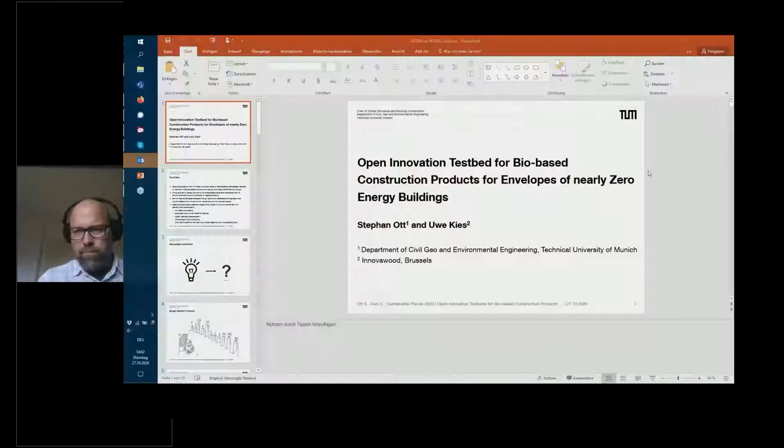Hello everybody, I hope you can see my screen now. I switch to the presentation mode. Please give me a short feedback if everything is okay. Yes, Stephan, we can see your screen.

Okay perfect, thank you very much Zia for the nice introduction. As you heard, the title is about innovation, about construction products related to nearly zero energy buildings. I will present this short talk together with Uwe Kies, who is co-writer of this presentation.

We are going to show you and discuss our open testbed initiative, which is a loose collaboration between several European testbeds or testing facilities and approval bodies dealing with research and development of construction products, and also helping SMEs and industry companies bring their products to market, and certify, test and approve the products.

So what's all about in this very important area, now accelerating with the new Green Deal, of nearly zero energy buildings and the related products, and what can we contribute to this.

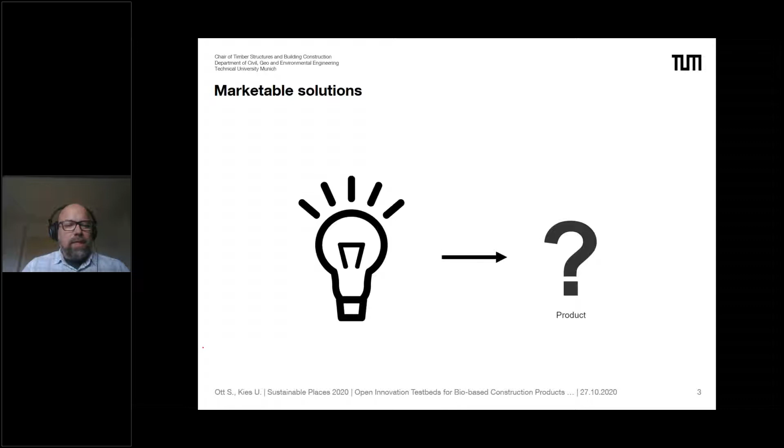There are several issues we should consider, because it's not so easy to bring a product to the market. The steps from the first idea until it's a real product that can be marketed are a very tough journey.

In this slide I want to highlight that it's also difficult to address the European market with a product, because although we have the single market, we still have different gates we have to fit into. There are common harmonized European standards for certain products, but not for all products, and there are additional national requirements that have to be fulfilled when the product is supplied in a national market.

So when we follow this route, or when the manufacturer starts with this new product idea and wants to bring it to the market, he normally goes to the technical authorities of his country—for this example, it's a German Institute for Construction Technology—and they give feedback on the requirements of this product based on the harmonized European standards, the harmonized EN standards. If there are no harmonized standards available for this category of product, a European assessment document needs to be developed.

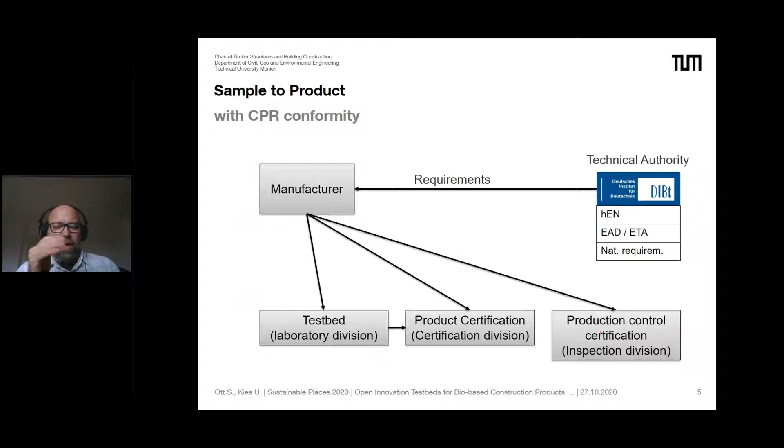So you see also what different steps have to be done in testing or fulfilling the requirements or approval of the requirements. There's normally the test beds which do the testing and check the performance of the products. Then the product certification is done with its own division, which is separated from the test beds normally to avoid any conflict of interest. And then there is also follow-up production control of the product to ensure its quality.

How do we achieve now the replicable and upscalable product, which can really address the market and also can be sold throughout Europe?

We want to focus, or our testbed is mainly focused on the bio-based materials.

And the bio-based materials are important in this New Green Deal initiative, and also for future climate change mitigation measures as a very important material group, because they can capture carbon by their nature, and it's also a material which can be produced and manufactured very easily. It's lightweight, and it's still strong, and you can make a huge bunch of products out of it. But let's say why we also join forces in this area is this product is a natural product.

Therefore there's inhomogeneity and anisotropic properties of the material. And as you see in the right picture in the forest, no tree resembles another one exactly, and you see it also here in the detailed cross-section or cut of this log, that you have different properties throughout the entire diameter of this cross-section.

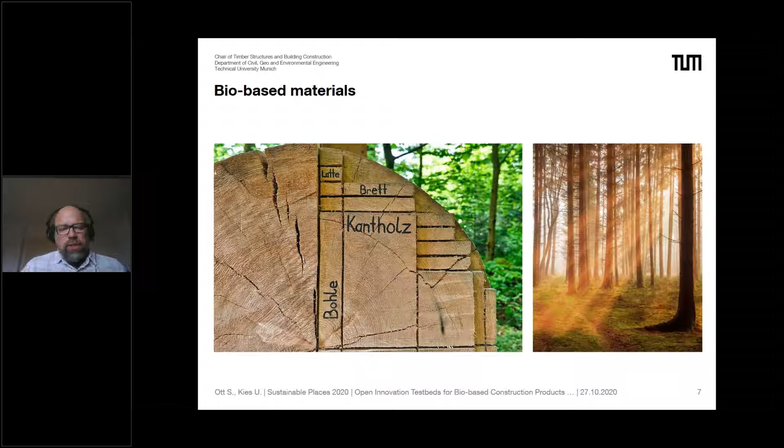So what we need here is also a quite deep insight into this material, a good understanding, and therefore this group of experts is joining forces to develop, with new tools and innovations, the knowledge on this material, and how to bring this knowledge also into the market.

I just want first to highlight again the very important issue of the carbon capture properties of this material, because when you look only at the forest system on the left-hand side, you have already this carbon sequestration or carbon capture by the growth of the plants, and then if they are not used, you have an output of this biogenic carbon. It's an emission—in the end the balance is zero, but there are these emissions.

But when we continue and use some of the trees and make place for a new tree or new plants to grow on this area, this new plant can capture carbon, and we can use this tree for producing material, manufacture and transform this raw material into useful products, and still store a lot of carbon inside this material itself—if we consider that our input of carbon storage in the material is higher than the output for producing it in the building sector or in the product.

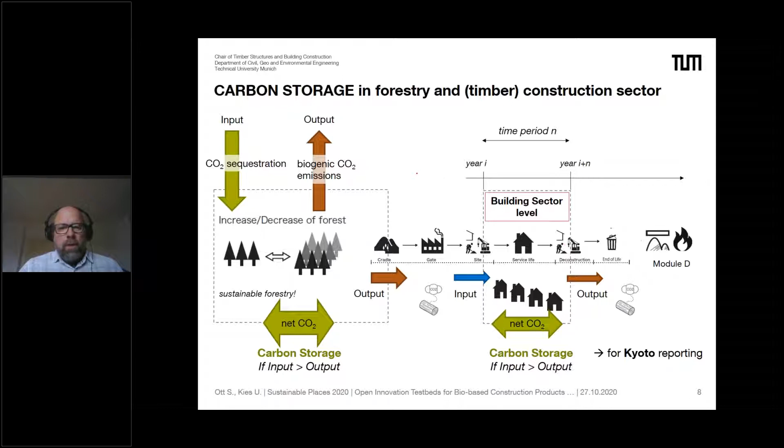As I said, the product is very inhomogeneous, the material is very inhomogeneous. So we have to consider different approaches to tackle the performance and characteristics of the material, and there are diverse types of use of this material in different products with different properties, because they are transformed not only once but several times.

What I want to lay out here is that we have to consider natural products which are harvested and processed. They have a given microstructure by nature, by their growth, and inherent properties which are not equal, because they are natural materials. But these are the natural products.

Then we have classical products, traditionally processed, which have their own microstructure because they are made out of particles from the natural product together with an artificial binder or compound material, pressed into a homogenized material in these profiles. This material also has characteristic properties, but it's still a plain material which is mass produced, and very often has only one single function—like here, a load-bearing profile for fixture of other stuff.

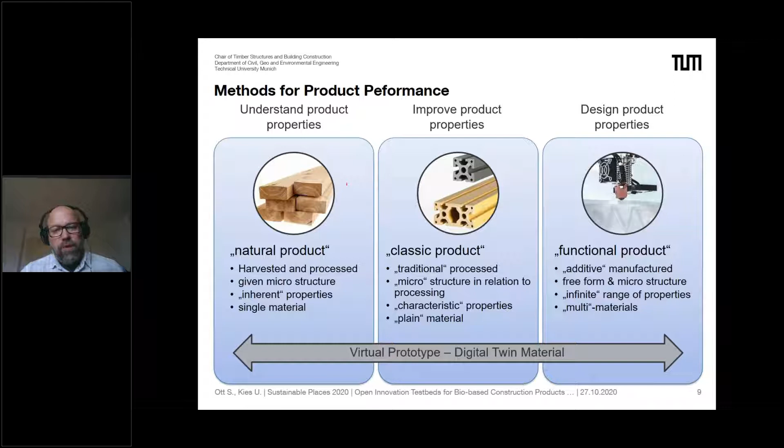To come from these natural materials and products to these functional products, you need virtual prototyping, and you need digital twins of this material where you have the characterization of these properties. Then when you want to improve or adjust this product performance, you have to optimize it. This optimization task—I just want to pick out two examples here.

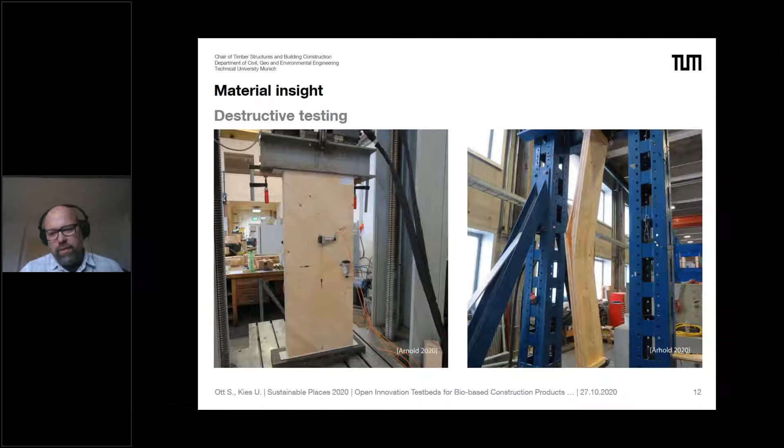We have here also other methods which are very important when it comes to these functional materials, which is non-destructive testing, for example using CT scanning, where we really get a material insight into the structure. Here is an example of a porous metal material, like a metal foam, which was CT scanned in layers, and from these layers the digital twin of this material was generated as a 3D model, with all the artifacts, deficiencies, and solid geometry incorporated.

This material insight gets us to the next step, where we can use this digital twin to simulate the properties and improve the characteristics virtually, or to test the strength of the material virtually, and try to find quicker and more targeted ways to develop the product further.

Not only is testing of the material possible, but also an advanced manufacturing process, or a test or simulation of the manufacturing process, can be done using data from previous samples. This can then be used for simulating the properties, and also artifacts or holes or deficiencies in new samples.

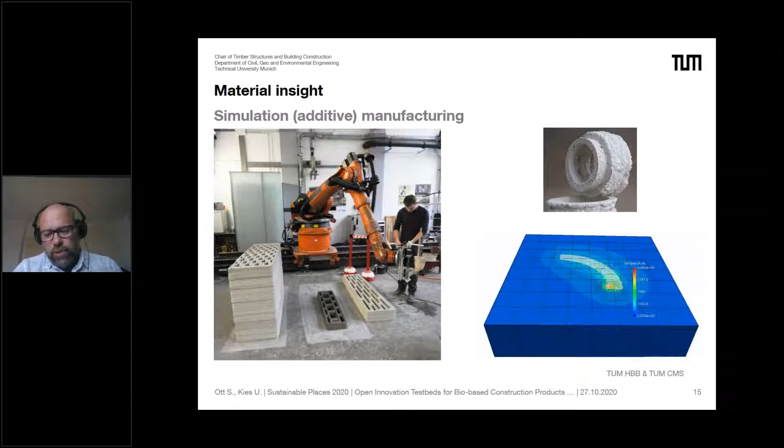Now I want to come to circularity, because we've looked at the possibilities of developing the more mechanical, structural, and process related properties. In the circularity field, there is also a lot of progress that can be made when the sustainability criteria are defined. For us, it's mainly using more bio-based materials, increasing the amount of secondary material in the products, looking for easier separability of materials, elimination of hazardous substances, and increased or longer cycles of use through increased durability and more cycles of reuse of the material.

We can also use the previously shown methods, CT scanning or processing and manufacturing simulation, to improve these sustainability criteria for circularity. This can be done on several levels, and I will now show you the different levels: the building level, the component level, and the material level.

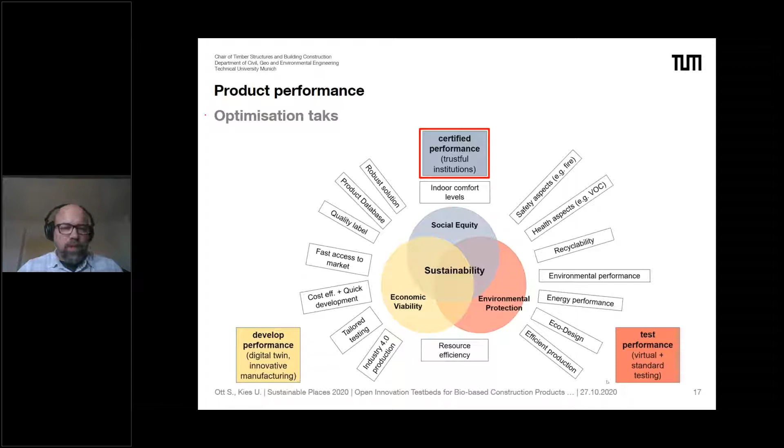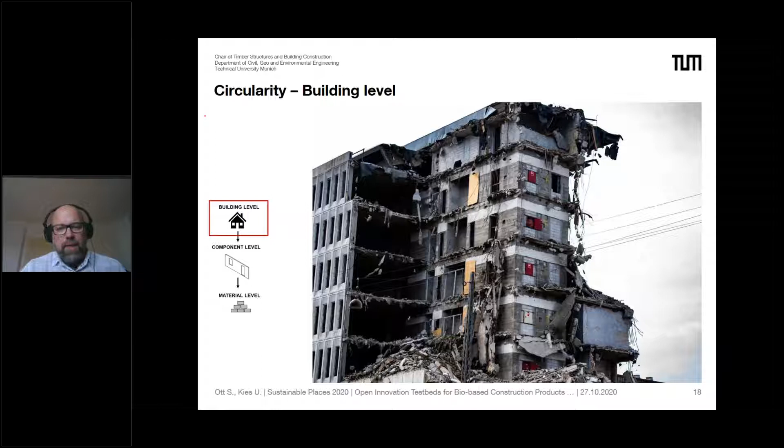Therefore it's important that new products are separable in a good way, so that they can be very clean in their separation, not containing hazardous substances, or being of one material group, so that they can be used at the highest level of recycling possible, hopefully closed loop recycled, or maybe open loop recycled, but with the material properties related to it.

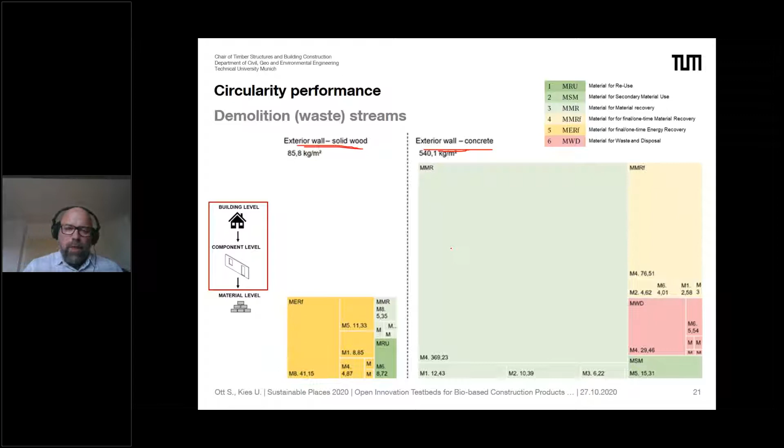By analyzing these structures, we get more information on how to optimize it, and also check for different variations of this composition, or look which solution might work best. We can also look closer at the connections and joints of the different layers, and how we can replace or adjust the jointing material, adhesives or glues to achieve better results in the overall rating of these waste streams, reducing the reddish yellowish colors to more green in our traffic light warning system.

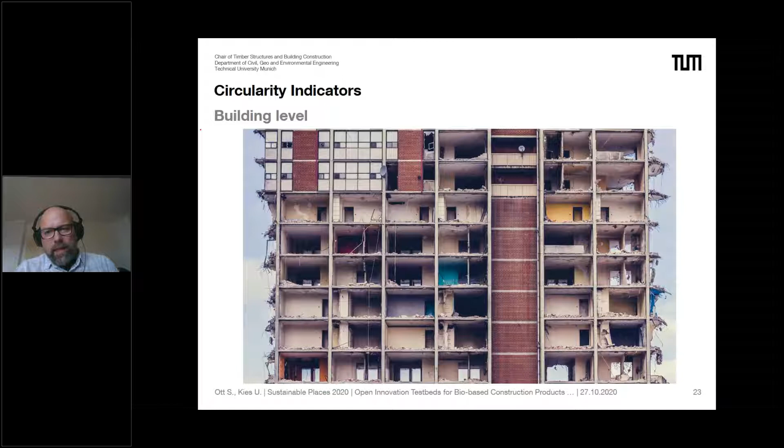Further on, we also can generate circularity indicators by this, but not so much on the building level. I want to refer to the known indicators for the building level, which are still competing on the market, so they are not the final standard yet—that still has to be found. Here you see an example from the Madaster score of building level circularity indicator, but there are also others like the BAMB indicator or other urban mining indicators in the market now, and there still needs to be a standardized or harmonized way to assess circularity.

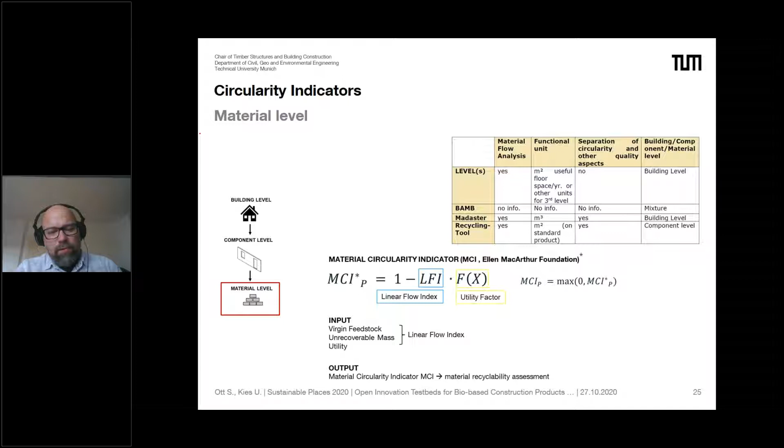We are more into the development of these circularity indicators on the material level, looking at the material flow index of materials in the building, but really on the single materials and how we can address the virgin feedstock or the unrecoverable mass, like here with this MCI material circularity indicator, and also what kind of utility factor the materials have.

Further on, you have seen already this example with the wall. We try to also combine the information for the environmental properties together with the information for the circularity properties, and we started here with this web platform. It's a web-based best practice example collection, which is also available in English now—in former times it was only available in German.

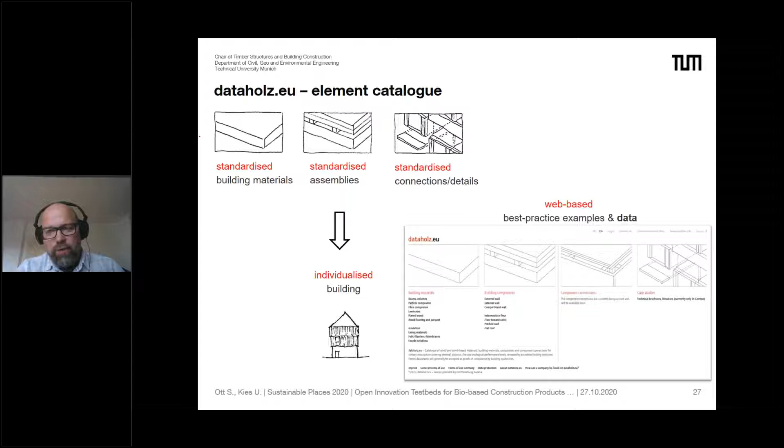Now you can see here standardized building materials, standardized assemblies, standardized connection details—this collection of approved construction solutions, standardized solutions, which are all related to bio-based materials. We enrich this with environmental data, and further on we also will enrich this data with circularity indicators.

Sorry, I can't hear you, Zia. Thank you. Sorry, okay, thanks Stephan.

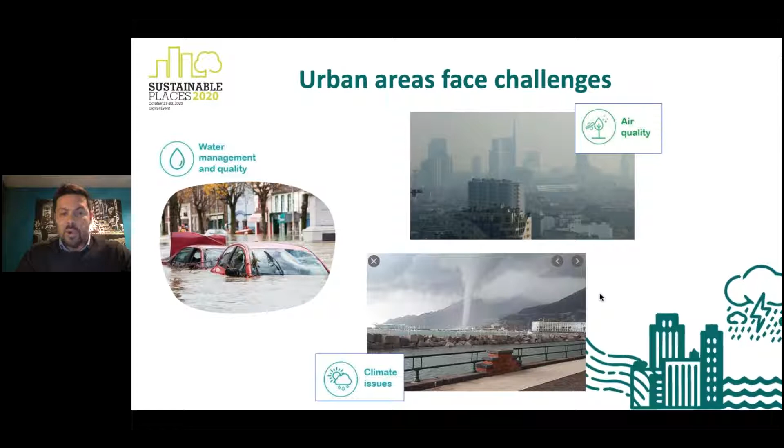Nature-based solutions are surely powerful mitigation measures that can be used to face these urban challenges. The next slides show some typologies of nature-based solutions implemented to face specific problems.

This one, for example, is related to dikes in a river. Dikes are normally placed near the river, and this can cause some problems when there is a moderate flow of water.

If we apply a different typology of structure, for example setting back the dikes from the river as a nature-based solution, we reduce the flooding risk.

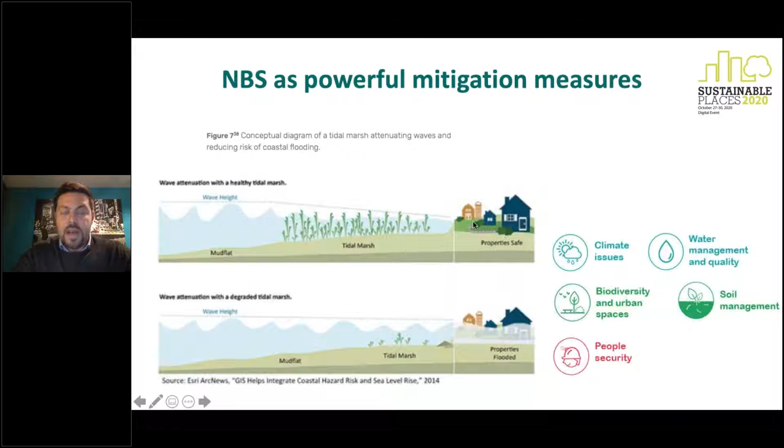Another example is how a healthy tidal marsh can attenuate wave height, and so reduce the flooding of properties placed near the sea coast.

In this case, the nature-based solution has been applied on the walls of the building, and it helps solve problems like air quality and improve the well-being of the people who live in this building.

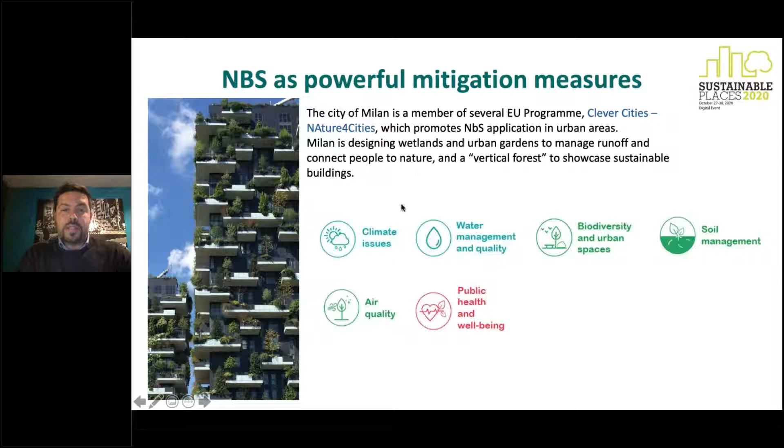Milan is a member of several European programs, like Clever Cities and Nature for Cities, which aim to apply NBS in the urban context. Milan is designing wetlands and urban gardens to manage runoff and connect people to nature, and one example is this vertical forest applied on the building.

Urban trees, parks and gardens act by intercepting fine dust in the air, absorbing pollutants, lowering temperature, as well as acting as a buffer effect during floods.

So we understand that green areas are also an opportunity for recreation, an opportunity to improve well-being, and an opportunity to face the urban challenges we discussed before.

This has been stressed further by the current coronavirus emergency, because we have seen a necessity for green areas, public parks, and green parks in cities.

This is an example from the city where I live. During the lockdown period in Italy, when people were allowed to go out for a run or to play with children, these green areas—completely green areas—were full of people out playing.

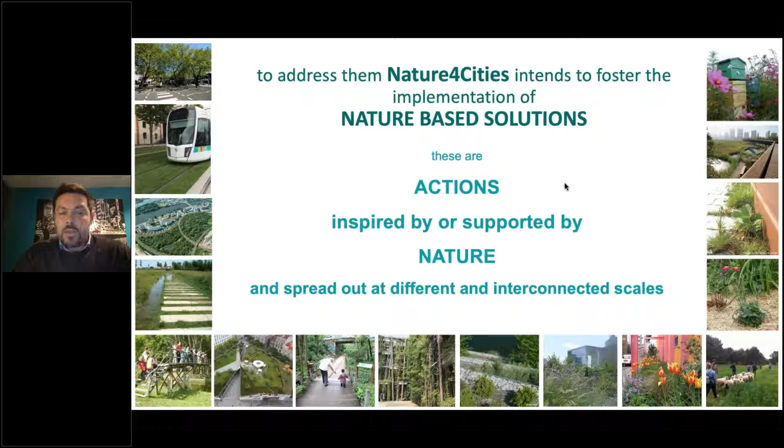The objective of the Nature for Cities project is to address these urban challenges by fostering the implementation of nature-based solutions. I'm sure you already know well what a nature-based solution is, but let me give a quick definition here. Nature-based solutions are actions that are inspired or supported by nature and are spread out at different and interconnected scales. So we are facing these urban challenges within the Nature for Cities project in different cities around Europe, and Milan in Italy is also involved.

The Nature for Cities project is a Horizon 2020 project that involves 27 partners and has a total budget of 7.5 million euros. The objective is the integration of nature-based solutions in urban areas to create a new and active community network around nature-based solutions, to spread high-quality knowledge, implement new assessment tools for developing nature-based solution actions in urban contexts, and also to develop new governance, business and financial models for NBS implementation.

So the main output of this project is the Nature for Cities platform. You have to see this platform as a sort of box that contains all the tools useful for policymakers, urban professionals such as landscape architects, and inhabitants, to select the nature-based solution most appropriate to face the specific urban challenge that the city faces. It is a sort of guide to the overall process of creating, selecting, assessing and implementing an NBS project in an urban context.

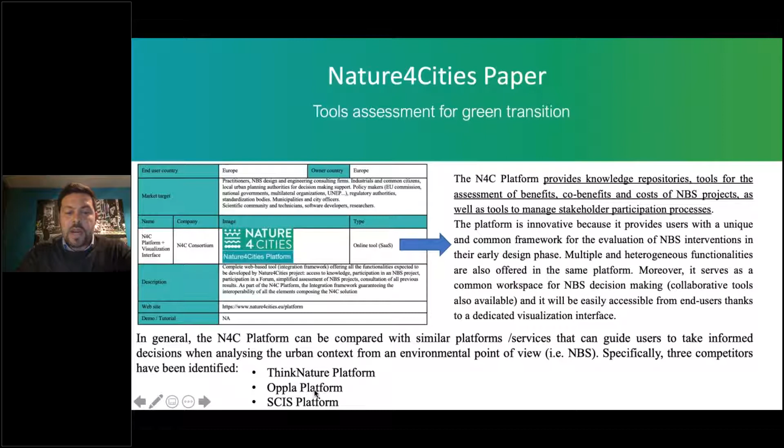In general, the Nature for Cities platform can be compared with similar platforms or services that provide end users information about how to apply or select an NBS action for cities. We identified three main competitors: the ThinkNature platform, the Oppla platform, and the Smart Cities Information System.

For each of these competitors, we developed a detailed analysis summarized in the SWOT analysis we conducted. For example, the ThinkNature platform is conceived as a multi-stakeholder and communication platform, but its primary objective is to support the understanding and promotion of nature-based solutions. However, it doesn't allow performing simulations capable of assessing the impact of NBS.

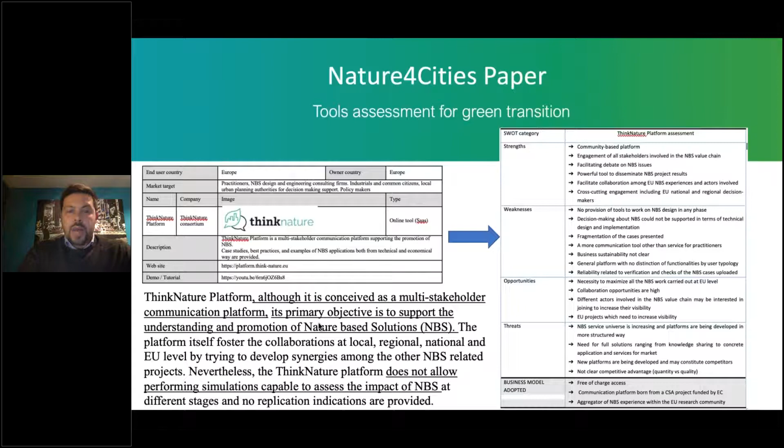Well, we have the Oppla platform that is a sort of repository for new services and tools related to NBS implementation. We have to see it as a sort of marketplace, but sometimes it could be difficult to find, for example, the right tool that can help you design the right NBS, or select the best implementation model for the NBS you have selected. So the Oppla platform is more intended as a dissemination tool and a promotional portal for NBS tools and database, and it is not exactly a structured system that provides users detailed information on the impact of this NBS.

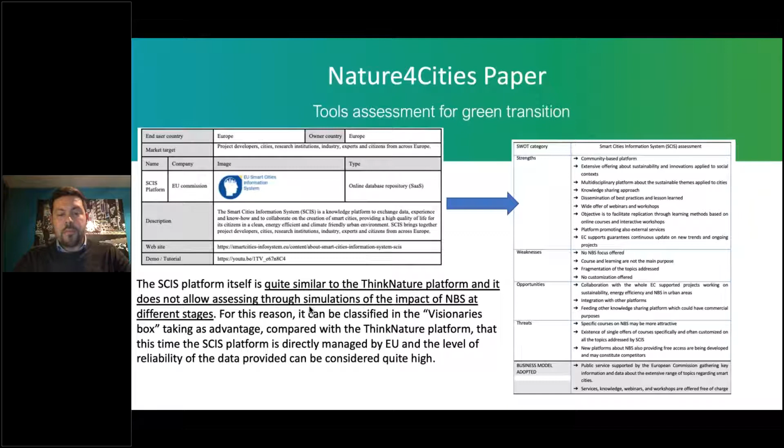So sometimes it could be very difficult to go through this platform and select the right tool that could help you. Then there is the Smart Cities Information System that is more similar to the ThinkNature platform. Anyway, it doesn't allow assessing through simulation the impact of the NBS at different stages. But this platform is owned and managed directly by the European Commission, and the level of reliability of the data provided within this platform can be considered quite high.

Let's go on. So from the analysis of the competitors, what came out is that the Nature for Cities platform basically offers a user-friendly environment in which the end users, expert citizens, can basically find all the tools necessary for all phases of the implementation of a nature-based solution project within the cities.

Basically, the most important thing is that the platform will help the end user to select the NBS, but also to launch some simulations at different levels in order to assess the direct impact of the nature-based solution project within the urban context, and this is something quite innovative.

And also the platform will help, for example, the municipalities that would like to apply nature-based solution actions within the cities to collaborate and engage with end users and citizens, because we have a dedicated tool for this.

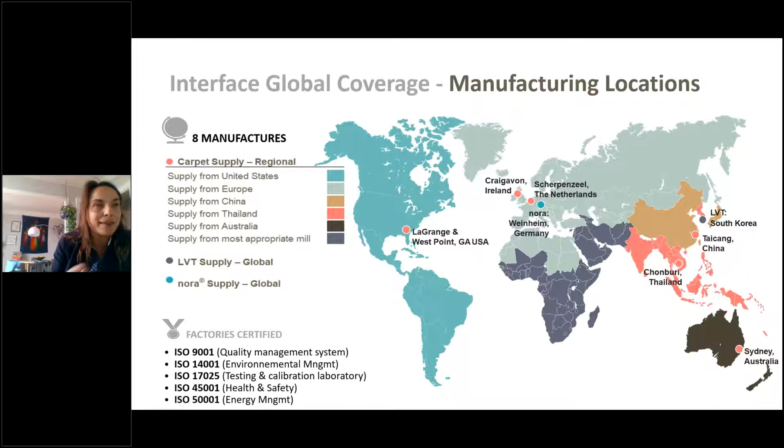Okay, so Interface is a global modular flooring company, which is to say that we manufacture carpet, LVT, and rug. As you can see, we have 8 factories around the world, 6 of which are dedicated to our historical know-how, which is to say carpet tile, because we want to be able to serve our customers as closely as possible. We are a traded company. Our turnover is $1.3 billion, and we are 5,400 employees around the world.

Our sustainable journey began in 1994, when one of our customers asked, 'What are you doing for the environment?' And at that time, we didn't have any answer. We lost the customer. But our founder, Ray Anderson, did really want to have an answer.

After reading Paul Hawken's book, The Ecology of Commerce, he had a vision. He wanted to run his business like nature does, in closed loop. He decided that his company would move from a linear model, take, make, waste, to a circular one.

This is how our first mission was born, Mission Zero. The goal is to eliminate any negative impact the company may have on the environment by 2020, so this year. To map our journey, Ray Anderson formed an eco-dream team with scientists, authors, entrepreneurs, and activists.

We drew a framework based on how everything in nature works in a closed loop. We determined 7 fronts to see how we can eliminate waste, operate with renewable energy, and work with healthy materials while being neutral on the environment.

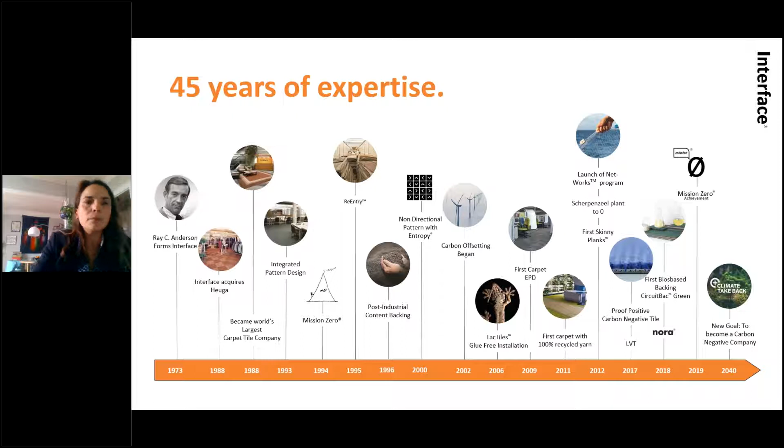We are also innovative in partnership. Our Net-Works program is a good example of an innovative, disruptive, inclusive, and circular model. In 2012, the company launched the program in the Philippines in partnership with the NGO ZSL and one of our yarn suppliers, Aquafil. Net-Works reduces the number of abandoned fishing nets in oceans, avoids wild fishing, and empowers local fisher communities.

As part of this program, Net-Works purchases used fishing nets from small artisanal fisherfolk for a fair price. These nets are then recycled into yarn by Aquafil to ultimately be used to make new carpet tile. This project is now extended to Indonesia and Cameroon, and has made it possible to collect 224 tons of waste fishing nets, providing over 2,200 families with access to finance and a cleaner, healthier environment, benefiting 64,000 people.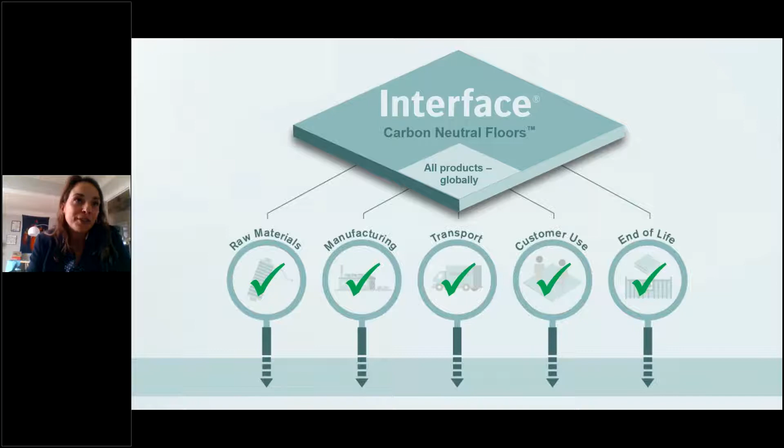Four years ago, we knew that we were going to achieve Mission Zero, so we asked ourselves, what do we do next? So we called the Eco Dream team that I've talked about, and we decided to launch a new mission. The name is Climate Take Back, and the aim is how to reverse climate change and become a regenerative company.

Last year, we set a new objective: be a carbon negative company by 2040. We've drawn four pillars to act.

Live Zero - move on with our Mission Zero and eliminate all the negative impact that remains. Love Carbon - consider carbon as a resource with raw materials that sequester carbon, for example bio-based materials. This is the way Stephan explained to you.

And let nature cool - how can our factories, products, and services participate in a positive way in the surrounding ecosystems, acting like high-performing ecosystems, and so help nature regulate the climate again. And at least, lead the industrial revolution - push the industry to act for the climate.

This year, we launched our first backing made of biocomposite with materials that are net carbon negative. On average, the total recycled and bio-based content of our product is 92.8% thanks to this new backing - meaning we are very, very close to getting rid of virgin material. In our product, we increased recycled and bio-based content by 33.9% and managed to reduce the CO2 footprint by one third.

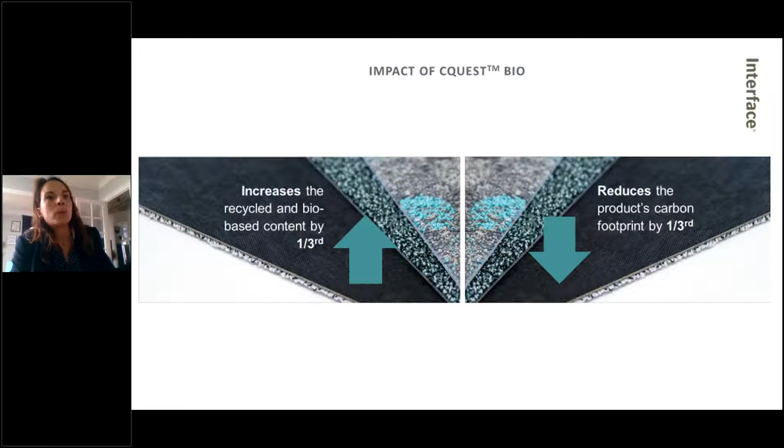Last week in the United States, we launched our first collection with negative impact. It is called Embodied Beauty, and cradle to gate, the results are minus 0.4 kilos of CO2 per square meter emissions. So this is the first carbon negative product, and we are very proud, because today in buildings, embodied carbon accounts for a large share of the emissions of the building's life.

I am also delighted to share that Interface has been awarded the UN Global Climate Action Award in the Climate Neutral Now category last week. Thank you very much, and if you have questions, feel free to ask.

Thank you, Laetitia. I have many questions, but I will leave them until the end. There are no questions from the audience so far, so thanks very much for that.

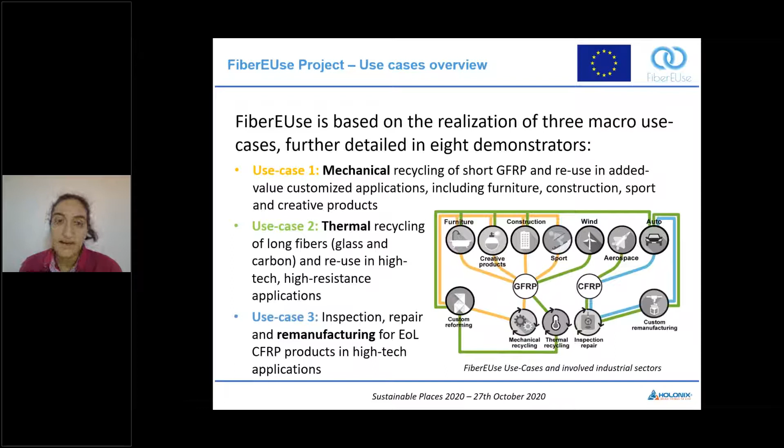The materials which are used for the thermal recycling are taken from wind blades and from the aerospace sector. Then the other use case is related to mechanical recycling, again for short glass fiber, which are used again in furniture, but also construction, sport and so on.

This is one of the value chains that we have created inside the project, which shows that we are connecting different sectors and creating a circular solution and the circular life of objects. For example, starting from wind blades or construction, we are able to have mechanical recycling of the material which are collected here, so not wasted, but reused.

They are collected and managed thanks to the logistical operators, which are all across Europe. And they are re-elaborated by different technology providers, which are in the project adopting different solutions and processes to create something new and new technologies. But we are also working with designers to create new solutions, new processes, but also new products.

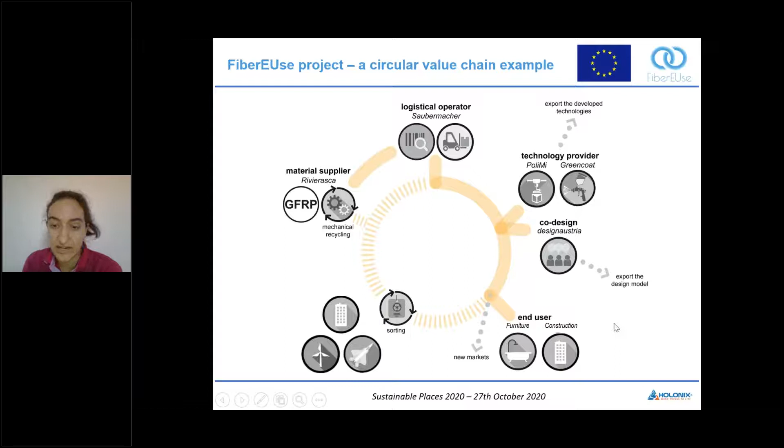Then we are creating new final products, for example, again in furniture and in construction. This will be able to go back again into the same sectors - for example, here you see construction, which is just an example - or it can go to new markets. The creation of this circle is the base of the information management that we have analyzed to start creating our circular IT solution.

Okay, so the base is, I will just keep some highlights. The need of taking back products is relevant for the management of information, because we have to know what information has been taken back and reused, and we have to keep track of that. But it is also relevant to understand if and how it is possible to make profit for the objects moving across the value chain and across the circle.

Then there's the creation of new product concepts, because as we know, there is a need to not only try to do the same products and objects with virgin materials, but a need to understand how to work on new projects with recycled materials. This is again relevant from the IT point of view, for information management, because it means we are going to work with materials and objects which are unknown or which can be different every time we get a new recycled object or material.

So going deep into the analysis of the value chains, we had some analysis of the stakeholders' needs, and I will give an overview.

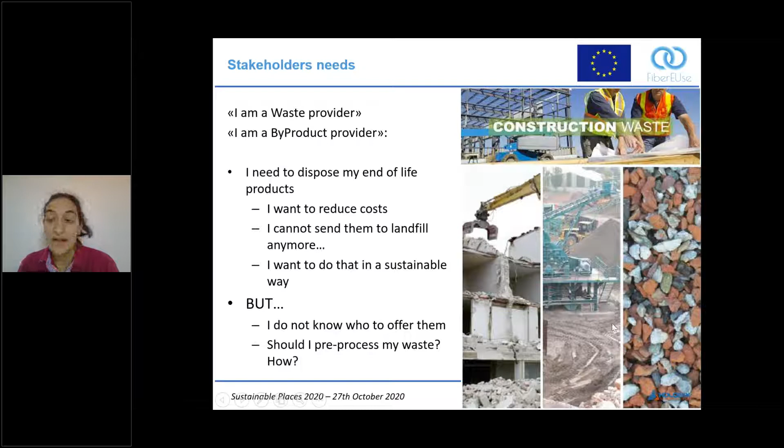These limitations are related, on one side, to the capacities of the materials and technologies, and on the other side, to the legislation. Another need is related to the producers - companies which have the processes and technologies to process the material, to change its status.

They are interested in working with new materials that are less expensive than traditional ones, but also interested in proposing new materials which have the same or similar properties to traditional ones - maybe something new, but with the same resistance, for example. They also need to manage availability, because producers need to work with material that has standard availability, and it cannot be different every time they work on a new product.

But the problem is that at the beginning, the first time, they are not able to compare traditional materials with new materials. So they need to understand, to have an analysis or information related to specific characteristics. A general description is not enough, because in a general description of a traditional material, some characteristics are known, common.

You know that if you have a brick, it has specific static and material physics characteristics. But what happens if you have something similar made of a new material - what is the resistance, what is the temperature, whatever? You don't know the characteristics. So there is a need to learn how to describe new materials through their characteristics.

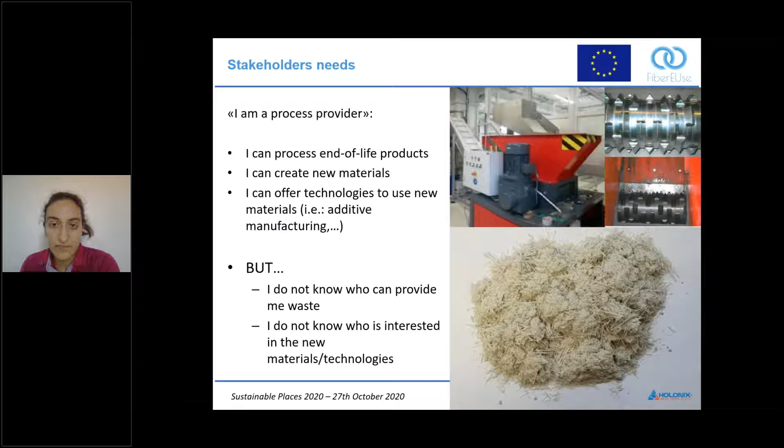Logistic operators can pre-process the materials and transport end-of-life products, so waste in the common view. They can also organize national and international transport, but they are not always aware of who needs the services, because we are going outside the common linear value chain. So we are creating new connections, and they also need to be connected. And they also don't know which regulations apply to waste.

At the moment, something is changing. We are all related to waste. So every time we are dismantling a product, we officially have a waste, and this needs to be changed. So we are quickly moving to the end-of-waste concept, which is now mentioned recently in Italian legislation, for example, but this is a must that should come and should be regulated across Europe, because we have to change from the concept of waste to the concept of object.

And we have a proposal through this platform. So going to information management, here is the description of what happens in a linear economy: from the extraction of a material to the end of life. This means that at the end we have waste, but I'm saying something common which you all know, as you are here at this Sustainable Places event. So what happens in the circular economy?

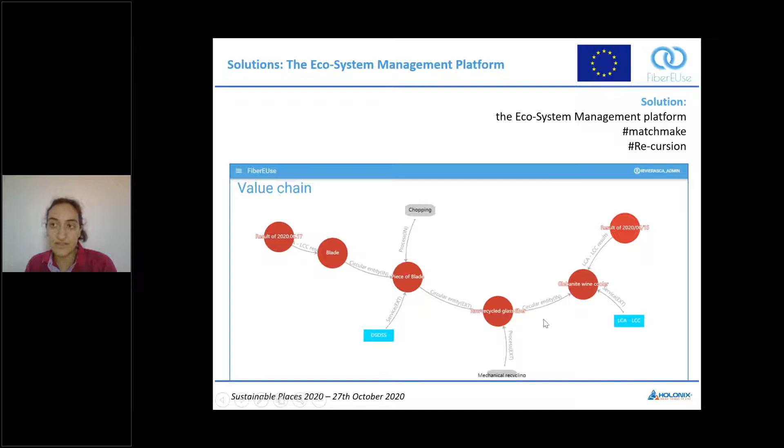We are starting now with the real adoption. As I was saying, the information which is inserted here is real, and we are starting at the moment with real adoption with partners. We know that we are creating some circles which are closing, so we hope that in a few months we will have this ecosystem chart really representing the circularity of the new ecosystem that we have created in FiberEUse.

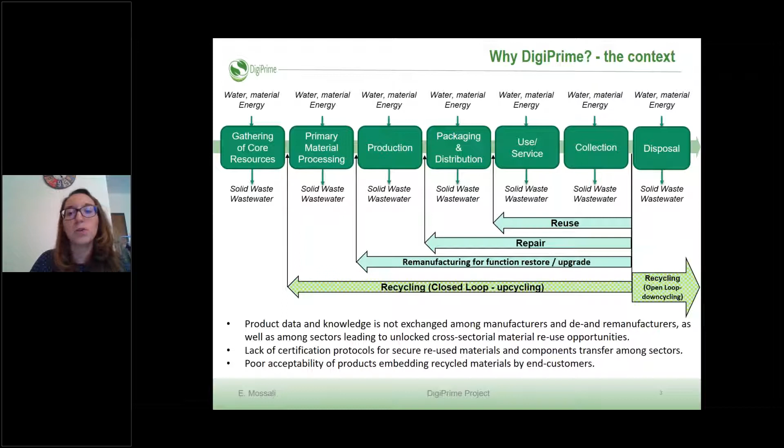Obviously, this transition towards circular business cases, circular economy, is not easy and has lots of challenges to face. We have already cited the lack of information for the different actors and stakeholders of the value chain, but there are also, for example, the lack of certification to regulate the remanufactured product and secondary applications we obtain with this circular economy approach, or the poor acceptability in the market of recycled products, because consumers feel the product is less performant since it is made by recycled material. These are the main challenges, but there are lots of challenges connected to this transition to the circular economy.

The DigiPrime project, which wants to facilitate and boost this transition, is based on different services aimed to support end-of-life treatment and processes, for example through the sharing of data and information between different actors and stakeholders of the value chain. But this will happen not only within the same sector, for example from the battery producer to battery recyclers, but also in a cross-sectorial way, for example from the battery producer to the renewable energy sector that will use the remanufactured batteries at the end of their first life, for secondary applications.

Beside this sharing of information, DigiPrime also aims to ensure the interoperability and scalability of the developed platform with existing platforms and tools used by the different actors. This wants to demonstrate the economic, social, and environmental sustainability of these new circular business models, also supported by new standardization and new legislation that consider the barriers we need to face and support this transition.

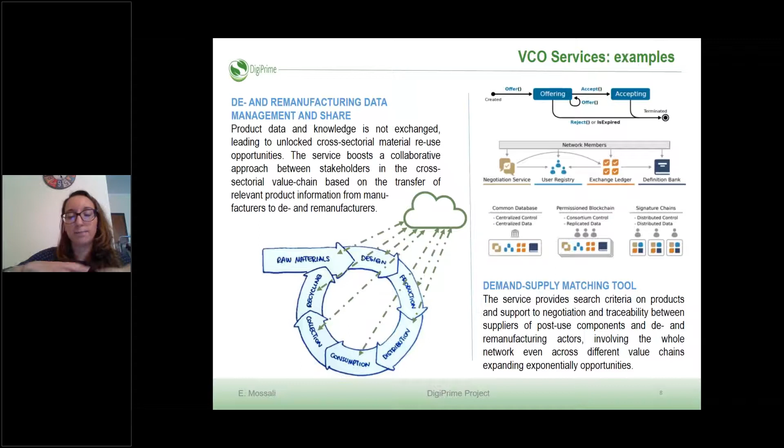Then we have operational services, for example the circular production planning or the material testing and certification, used by the single company. For the circular production planning, we have information on the incoming volumes, the characteristics of the waste, so that the recycler could set up and optimize the process according to the incoming waste. And could schedule and plan the production according also to the demand for secondary application from the final user. The material testing and certification instead is a support at the end of the value chain.

So when we have the remanufactured product, the recovered compounds, we need a certification, because a material that goes into a sector for pigments or re-enters the loop of batteries, for example, needs different properties and different standardization and certification. This type of tool helps support this type of process.

Once developed, the services will be demonstrated in real industrial scenarios through the pilots. We have 6 pilots, and the first 4 pilots are related to the demonstration of a specific value chain, connected to specific products: batteries, mechatronic and electronics products, composites and technopolymers, and textile components. In this case, we have a value chain focused on a specific product, but that connects different sectors, because we have automotive, renewable energy, and so on.

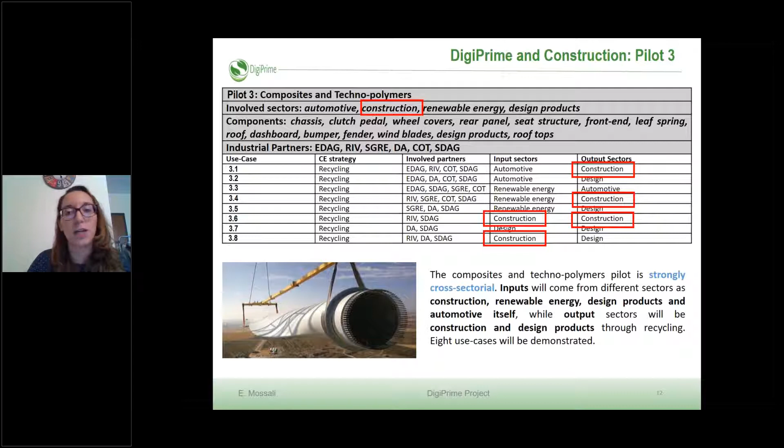Nowadays this is not a robust value chain, and in particular there are few European examples of this value chain, but they are limited to specific cases. For example, a company that recycles its own waste because it knows the composition and mechanical properties, so it could be easy to recycle its own waste. But the idea is to extend this type of value chain, these operations and steps, also to more complex products coming from outside the companies.

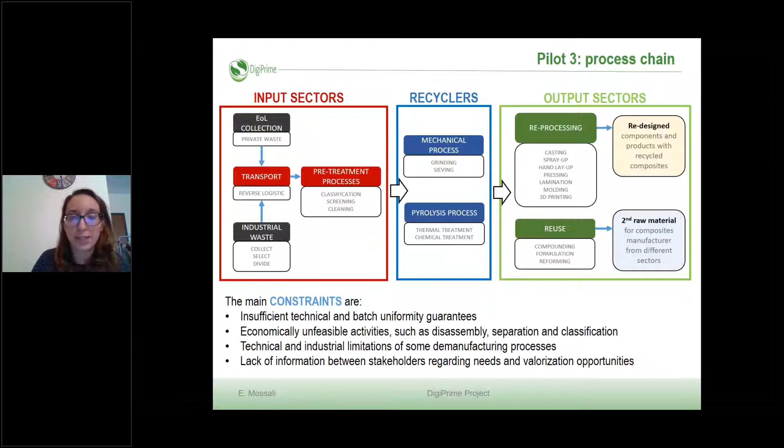For example, wind blades, or other types of materials coming from different sectors. The constraints related to this type of approach, obviously, are the lack of information, but also the technical and economical feasibility of the processes. For example, pyrolysis could be difficult to perform for glass fiber reinforced materials, because the process is expensive, while the marketization of the final materials is not connected to a high economic gain. There are also technical limitations, because the process is connected to a partial degradation of the initial mechanical properties, and in some cases it could be technically difficult to obtain a final product that could be used, reused, or introduced in other applications.

According to this, here we can find the targets of the DigiPrime project that want to support this type of innovative value chain. For example, supporting manufacturing processes embedding recycled materials, increasing the recycling efficiency of the processes, the mechanical properties, and so on. And another main challenge of this approach, in this sector in particular, is the supply...

...of post-use composite, because there is no collection center, a central point where this type of waste is collected and distributed to recyclers. So DigiPrime also wants to support this direct interaction between the different actors to promote this type of material flow along the value chain.

And here, just to show the complexity of this type of approach, we can see the different stakeholders involved in the process, which are also different for the different sectors that we try to connect.

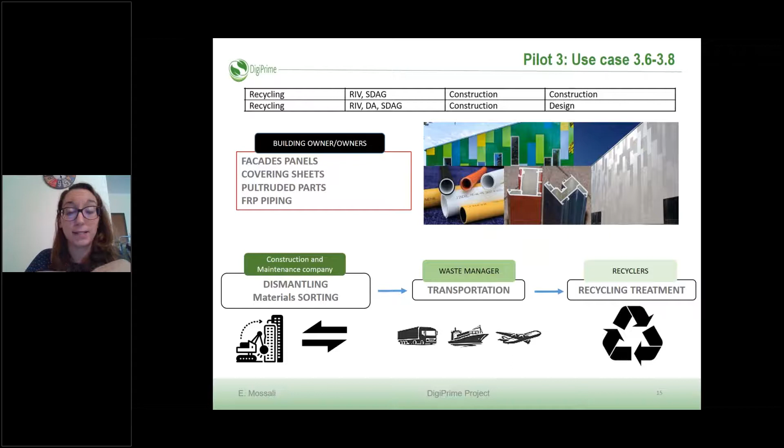Instead, here are the use cases that have construction as output. That means we start from waste that comes from different sectors, automotive, blades, but also construction, that are recycled, and the final recovered compounds and materials are then used again in construction for roof sheets, facade panels, and so on. So we can see the cross-sectoriality of the DigiPrime project, and the huge work of demonstration we will perform, because we want to show, demonstrate and validate in real industrial scenarios, connected to final products.

And obviously you see that we have examples. We talk about products, but we have some examples. We want to have the highest number possible of different applications to demonstrate the effectiveness of the DigiPrime platform.

To do that, we work on our pilots that are divided into many use cases, but we are also open to the different contributions that could be given by external companies and partners.

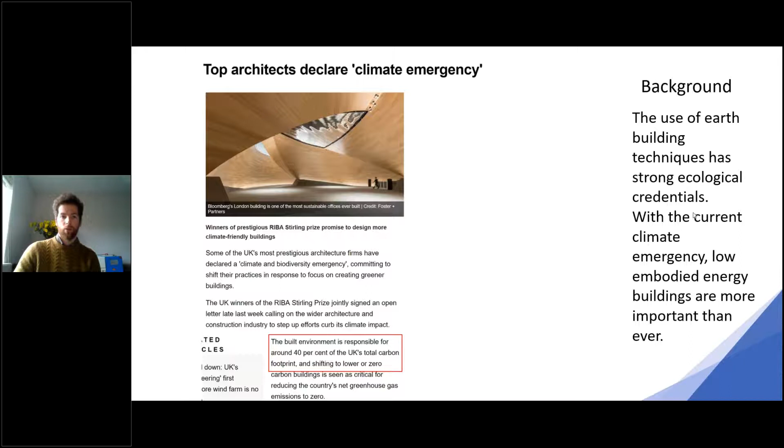One of the main things that CobBauge looks at is embodied energy. With buildings becoming more and more high performance, the operational energy is becoming less and less of a percentage of that life cycle assessment, so embodied energy is becoming more and more prevalent.

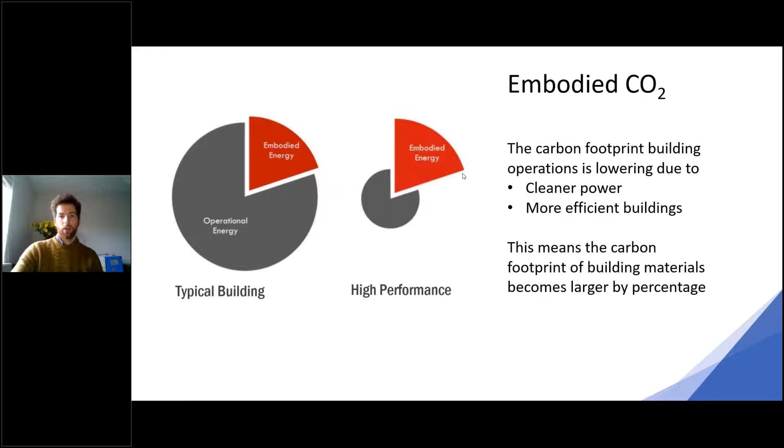Since I started university, it seemed to be all about life cycle, about operational carbon. I think there's now a really big focus on embodied energy, because saving carbon now that's embodied energy is a saving now, as opposed to over the course of the life of the building, which you may not get a return on for decades.

CobBauge is building with earth, and it's super simple. As you saw in Stephan's presentation at the start, modern buildings are getting really, really complicated with so many layers to get air tightness, to get insulative value, and then structure.

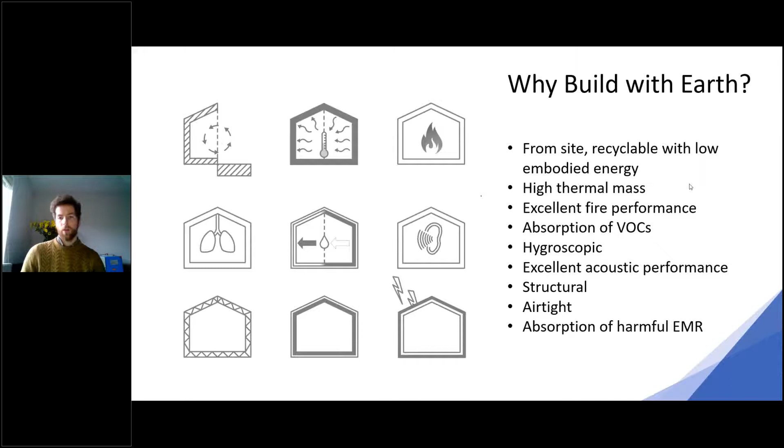Actually in a timber building, a typical timber wall, the actual amount of timber that's in that wall could be as little as 8%. So with timber construction, you're mainly building with things that aren't timber to try and augment the timber's natural materials. Obviously with something like cross-laminated timber, that would be higher, but then the embodied energy goes up because there's a lot of extra structure there, which strictly speaking doesn't really need to be there.

So building with earth has a lot of great inherent properties. As you saw on my last slide, my slides are moving themselves, so I hope you bear with me a little bit.

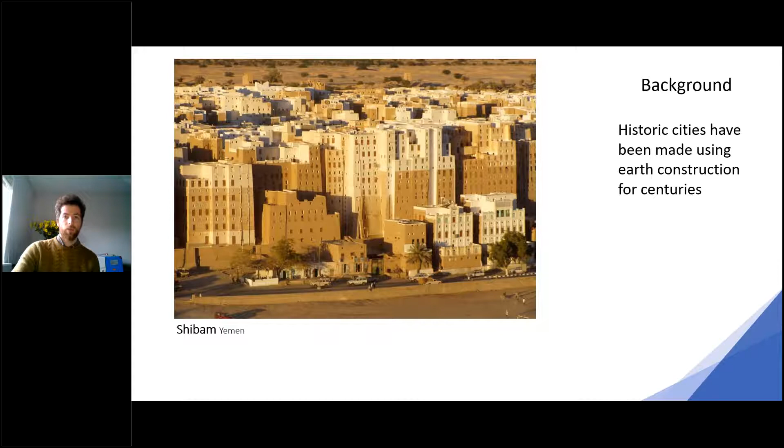A huge percentage of the world's population does live in earth buildings, and that's because it's a flexible material, it's everywhere, it's simple, it's easy to repair, it's easy to build with. Traditionally in drier parts of the world for obvious reasons, but there's a whole city in Yemen that is high-rise earth building, and it's stood for centuries. Some of it has stood for almost 1,000 years, and much of that city is still in residential use.

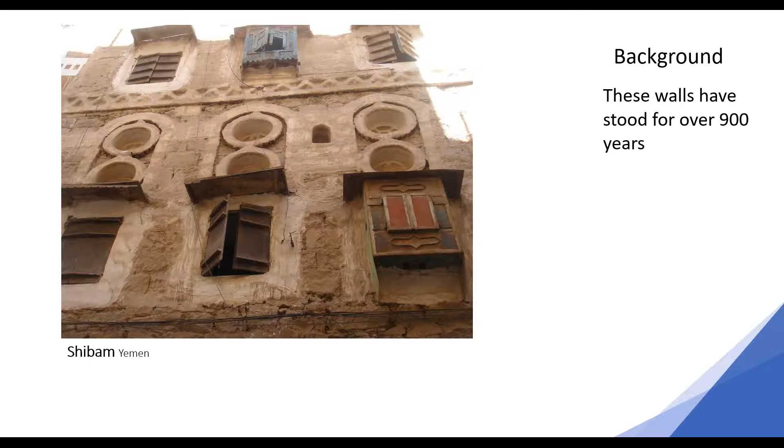It's a robust material that is easy to repair, that is low embodied energy, it has lots of great environmental qualities, including for indoor environment. It creates a really healthy environment with no volatile organic compounds, because it's simply earth.

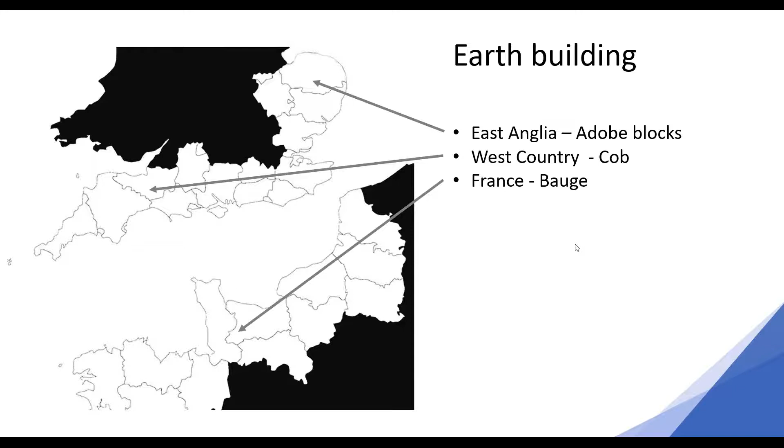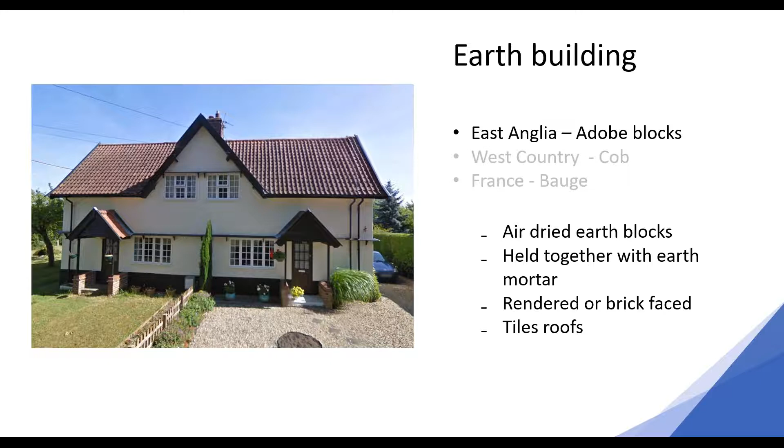Where I am just now in East Anglia, in the southeast of England, it's traditionally adobe blocks - pre-made, pre-dried, sun-dried blocks put together with an earth mortar. Very simple construction. This is actually council housing in the UK, down in East Anglia, built around 1900. It dries out those blocks and creates a building which looks fairly traditionally English. There doesn't look to be anything particularly unique about it, but it's actually made with earth blocks, not bricks, timber or stone.

So the CobBauge system tries to bring the good qualities of earth - it's structural, it's heavy, it's fireproof, it's got a huge amount of thermal mass. But if you augment the mixture with a much higher rate of fibre, such as flax or hemp, it actually has quite a good insulative value. We're able to put together both of these mixtures in a single wall build-up, creating the structure and the insulation all within what is essentially one material, albeit two different mixes of the same material.

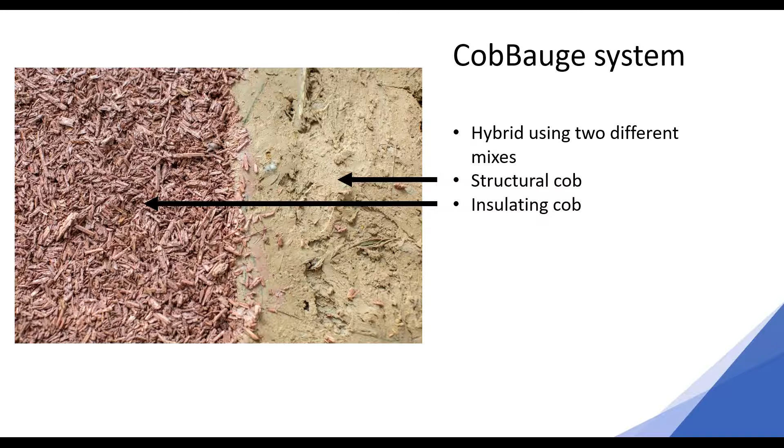This becomes a really simple wall build-up because on the inside, the heavyweight, a simple clay plaster will finish the wall off, and on the outside, a traditional lime render makes it waterproof and robust. There's so few materials in the actual wall build-up that it becomes simple to put up and create, and at the end of its life it can essentially be knocked down and left on site - there is no landfill. In the UK, over 60% of landfill comes from the construction industry, and I imagine that's not a dissimilar figure through large areas of Europe.

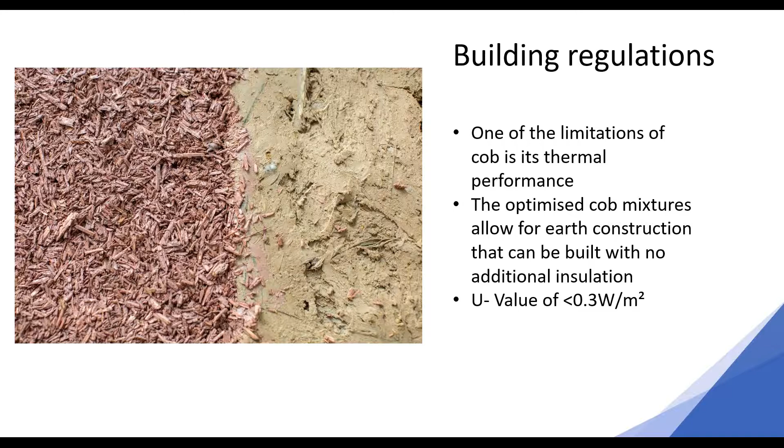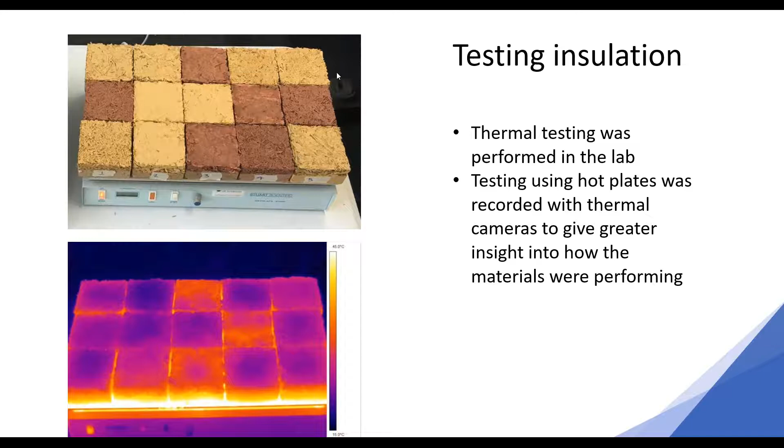The U-value we get is only 0.3 watts per square meter, but the performance we're hoping will be better than that. There's a huge amount of testing about different materials to use for our lightweight mix to get the best insulative value. You can see in this hot plate a good image illustrating the different types of mixtures and effects - these are all the same thickness and made in the same way, but with different insulating materials, and there's quite a difference between some of them.

This is some of the machinery they're using at Plymouth University to test the insulative material and qualities. There's been a huge amount of testing - they made dozens and dozens of blocks, and we got to the numbers we got to. Normally with the performance gap, you'd expect buildings to not quite perform as well as the calculated digital twin, which is something else we've been doing to test. But actually in really heavyweight, high thermal mass buildings, they tend to perform a lot better and much closer to their predicted performance. There are even some papers suggesting a building like this may outperform its predicted numbers, which is a pretty interesting place to be.

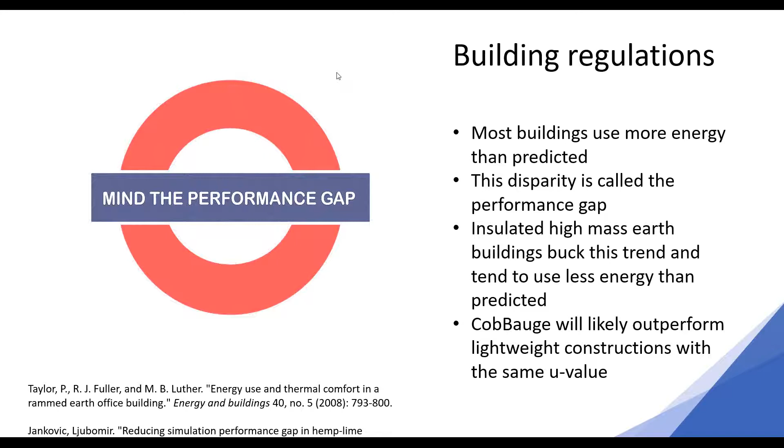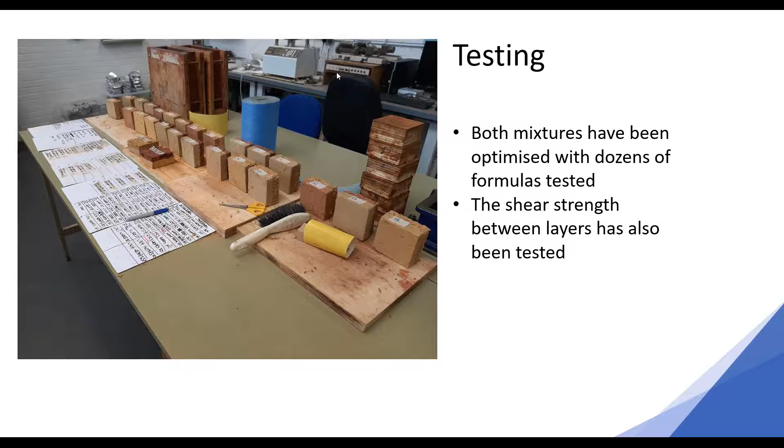But the proof of that will be in an actual building. So the structural aspect of testing has not been overlooked - we have mixed up dozens and dozens of different mixtures to get the absolute strongest cob material, but also with the least amount of shrinkage. This is the kind of facility we've been using at Plymouth, where we're able to crush and test these samples after making sure they don't shrink too much.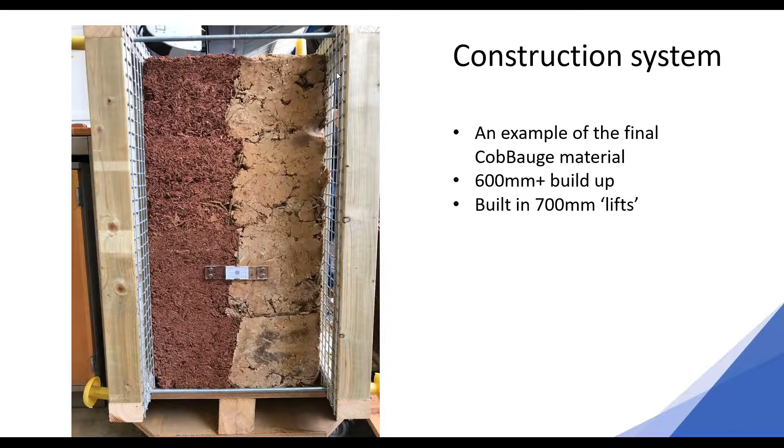This is a test block made in formwork, and you can see the heavyweight CobBauge on the right hand side and the lightweight on the left hand side, with the subtle zigzag pattern that allows them to really bond and interlock - they dry together in that pattern. The shear strength testing has shown there's a very good bond between the two different materials, so they're able to act as one. This is about the height, about 700 millimeters, that we would traditionally make.

There's not a huge tradition of formwork with cob, but we were able to find handbooks and manuals from over 100 years ago that show there is a tradition of formwork with cob. They state different thicknesses for different loads, and we almost started with that 100-year-old information to try and really build on that.

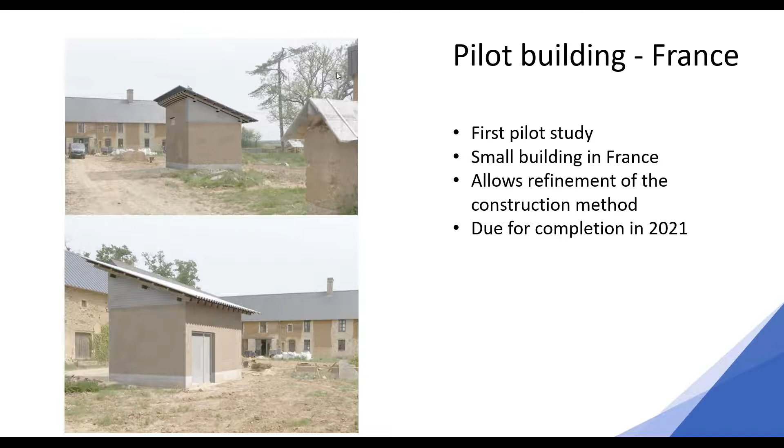So this is a pilot building in France. These are some digital images made to help us understand it. Fortunately, one of our partners is a national park in France, so they're able to put up a small structure like this without any planning permission, which in the UK we are very jealous of, because planning authority is one of the things we've struggled with to help understand the CobBauge project.

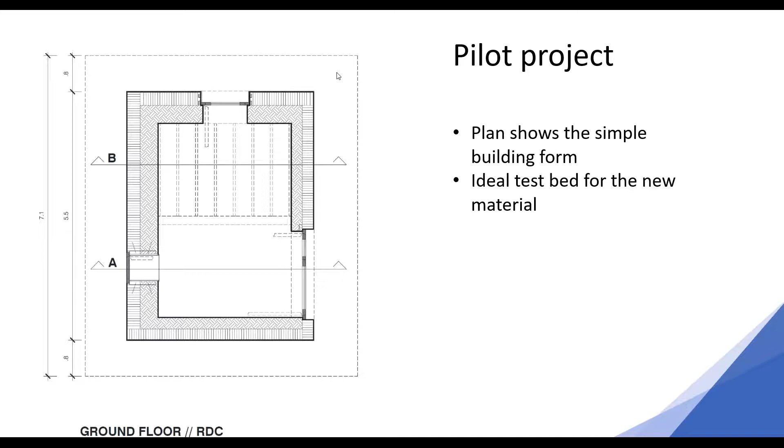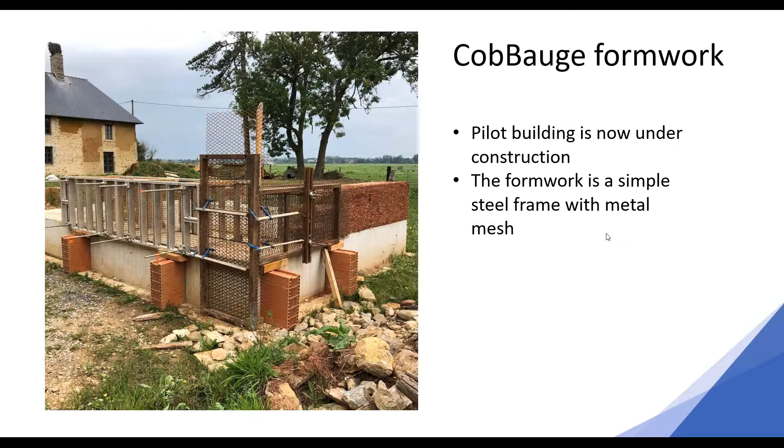So hopefully travel becomes a little bit easier in the new year. This was at the start of this year. You can see the formwork here - it's actually steel with a mesh. And the kind of mixers that we use.

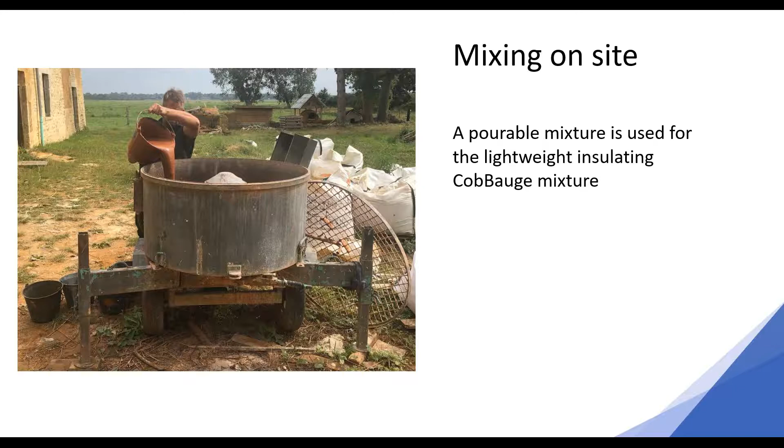So this is for the lightweight cob. They have fairly different consistencies when they're wet, so you can almost pour the lightweight cob. That's a slip that gets poured in with the fibrous material - in this case, reed, which was a waste product that wasn't mature enough to make thatch out of, so it would have usually been burned.

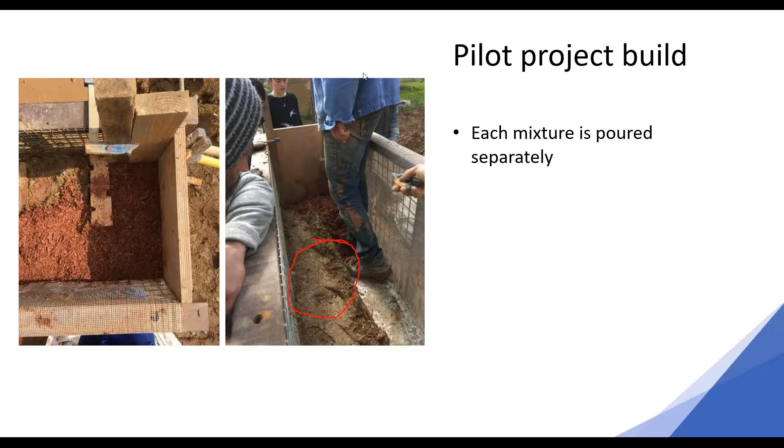So we were able to test it in France, and there's actually a really interesting video on YouTube, which you can find by just searching for CobBauge, because it's such a unique word. This is one of our French partners, Francois, taking out the lightweight mixture and then laying it. You can see the different mixes more clearly - it's put in like the photo on the right, with a small amount of the heavyweight cob put in, then some more heavyweight cob, and then the lightweight cob put in almost to match it, which helps form the zigzag pattern we saw earlier and get that really strong key between the two materials.

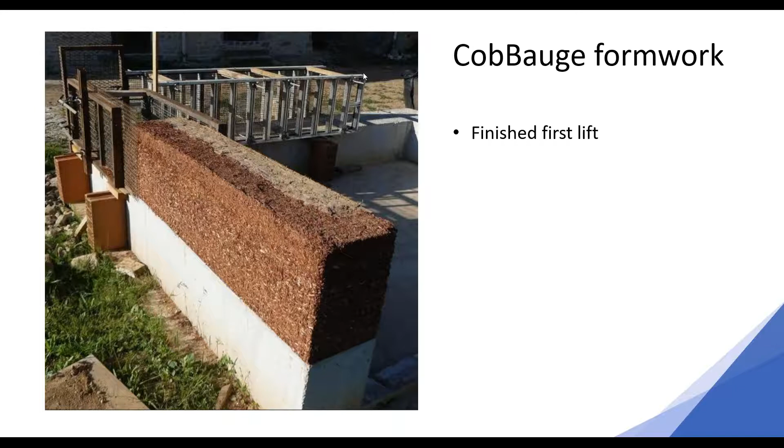So this is what a test finished lift looks like. That was left to dry for a week or so, which is definitely one of the more difficult things with CobBauge - learning when we can take off the formwork and it won't deform. Even though this is now able to self-support its shape, we actually need to wait several weeks before we can put the load of another lift on top of it. But even with a small building like this, that time elapses by simply working around the perimeter of the building.

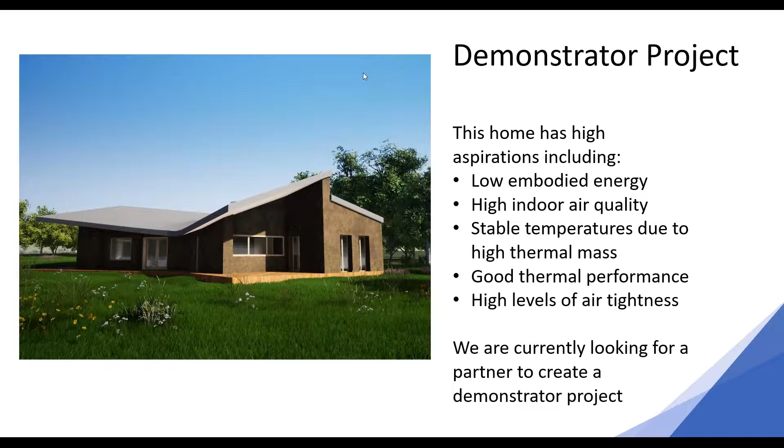So at Hudson, we've designed several demonstrator projects to figure out what we can and can't do with the material. It has high aspirations of low embodied energy and really high indoor air quality. The high thermal mass is really great for residential because of the stable temperatures. You can see here we've actually put in an extra thick structural spine wall in the middle, which makes it structurally more robust, but also allows us to cut pockets in for storage and really maximize the tactile qualities of the material. We can also gain a lot more thermal mass by having this thick wall, which again is great for internal thermal comfort. So we're thinking ahead about what we can do with CobBauge.

Can we learn from the concrete industry? Can we have pre-mixed CobBauge? We're actually in discussions with a contractor about that idea.

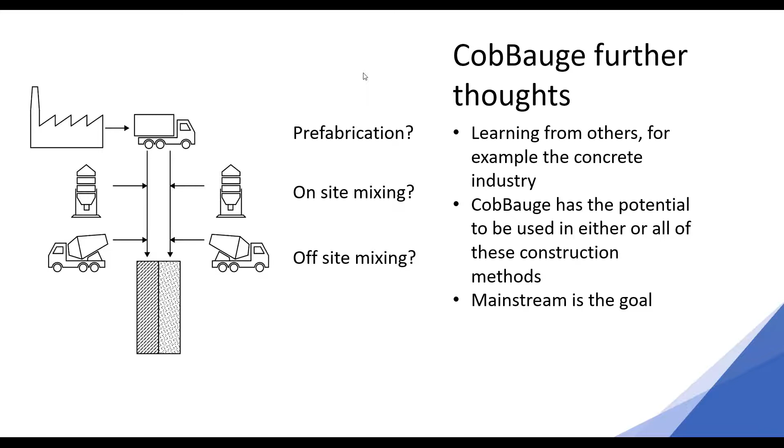One of the things about CobBauge is that we hopefully will be able to take earth and dirt from the construction site where the building's being built and augment it with sand, clay, or some aggregate. But that may not be possible — the site might be contaminated, so we're looking at being able to bring CobBauge to the site. One of the problems is that it's very heavy, so we're doing life cycle analysis to see if CobBauge is a suitable material for that.

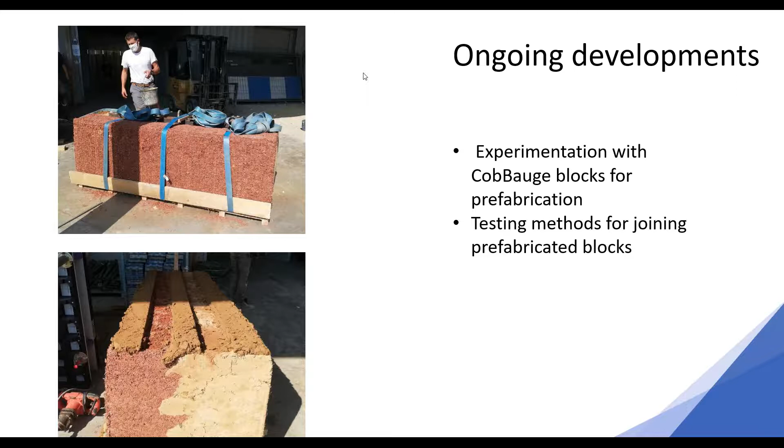We're also experimenting with prefabricated blocks and how they may go together, although we think this is now a project in of itself. So prefabricated blocks like this may become a separate project to CobBauge, but it was still a really interesting way of looking at the material.

These are some prototypes in France, just to see how easy it was to move these blocks — they're almost 2 metric tons each. Our French partners did an amazing job stacking them up neatly, and they were quite square and worked, although moving them caused some small damage because the material is relatively soft compared to something like concrete. But because it's essentially made out of water, earth, and fibrous materials — in this case I think it was flax — it's really easy to repair.

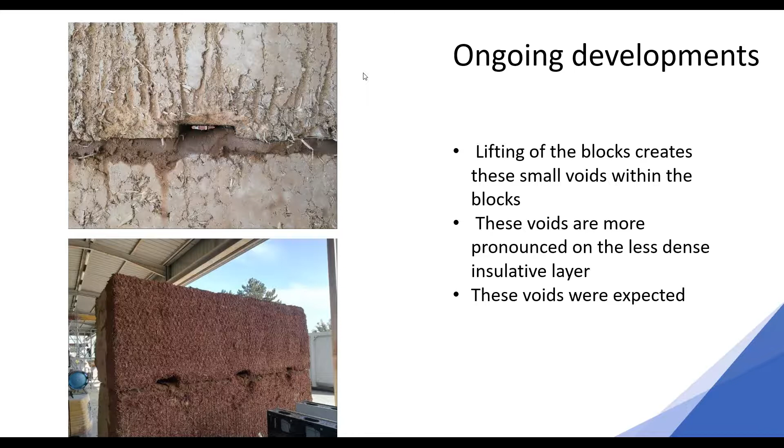That goes to one of the things about the material being robust: repairing it is very simple. Some water, some earth, and some fibers is all you really need.

Then we have to think about constructing buildings out of these. Buildings obviously have holes for windows and doors, so we were thinking about what sizes of block would work structurally, and how they would work together as a system. We're also pushing on with looking at earth floors and earth ceilings.

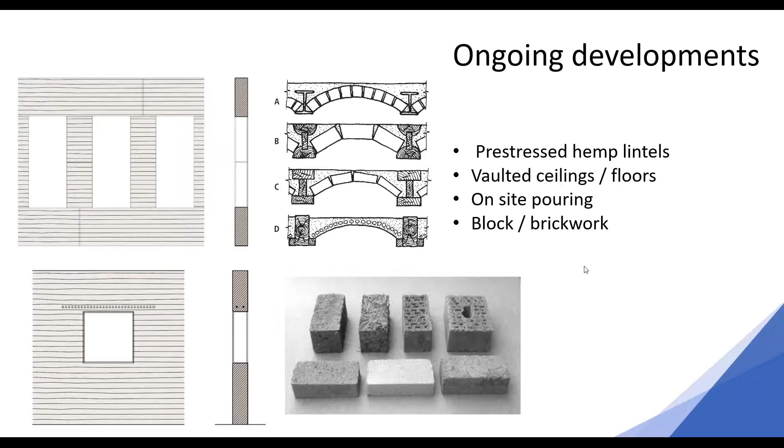We're looking at pre-stressed hemp lintels, which is really at the forefront of earth construction — being able to pre-stress earth. Again, learning from the concrete industry is something we're looking at. We're also looking at smaller pieces and comparing them to other earth blocks, and at perhaps having a timber structure with just the lightweight earth completely encasing it.

And I really look forward to finding out about more of the other projects as well. Thank you. Thank you, Andrew.